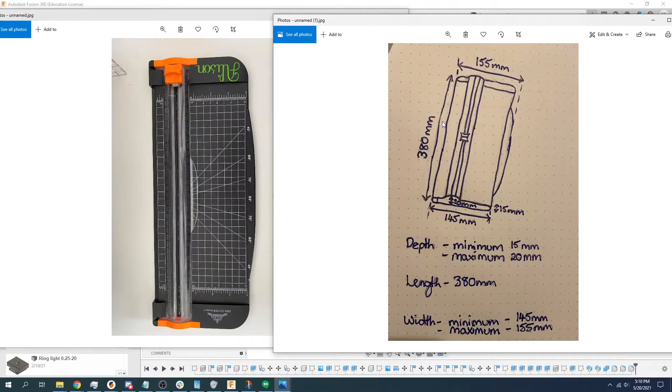So I'm going to get rid of this photo since it doesn't matter too much for what we're doing, and move it away. We're going to bring Small Grant into the picture. Hi, Small Grant. And of course we have the stunt double here with us, because Victoria is off making sure all the 3D printers are running happily.

It would be more expensive to print and ship. I believe Allison is in the UK, so that might be prohibitive. But if I'm correct, Allison got a 3D printer, and we're going to send her the file for this. Allison, if you want, I'll send you the raw Fusion file so you can make adjustments, or add logos or names before printing it out. If you didn't buy a 3D printer and I'm confusing you with somebody else, let me know and we'll find a way to get this to you.

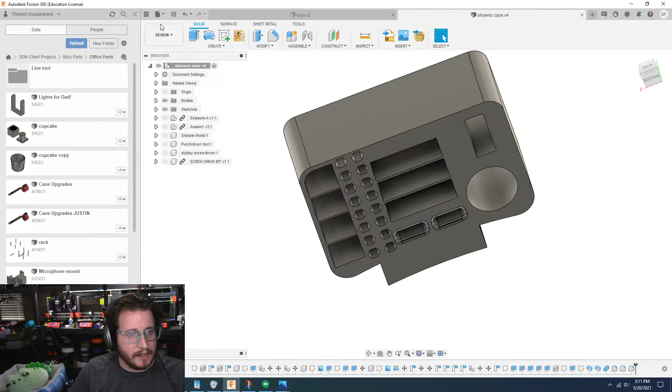But first things first, I am the realist, we need a new design here. I think this one is most effective to work from the front. So I'm looking at which direction I want to work from, and I believe the front is the best option since we're going to be extruding outward. So I just need to make my profiles for everything. This should actually not be too bad.

Okay, yeah, I'm sorry, I'm so busy that I forget who buys printers and who doesn't. Leash is the one who bought a printer, so sorry Allison. But wait, Allison, aren't you... we're gonna find a way to get these parts to you, come hell or high water. Damn it, I'm gonna find a way. But yes, I know a couple of our crafters have bought printers, and I honestly forget who.

Because for those who don't know, we've been doubling down heavily on content on our YouTube channel, which means I need to hire a lot of people. In the past 3 weeks I've had over 100 interviews to bring in new staff members so we can start taking marketing very seriously. That makes me happy as a business owner, that we're able to bring on more people, get money in the pockets of people that need it, and let people learn in an awesome, fun environment like this. Anybody who works with us can tell you, it's one awesome community we have here.

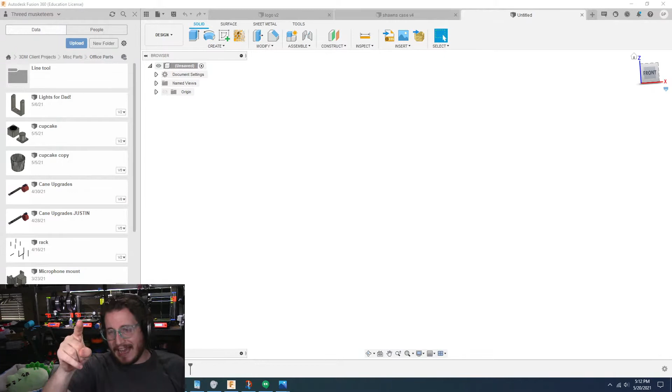Oh Justin, I like your idea buddy. We're going to reach out to Geeky Faye and see if she can make this part for Allison. I'll make sure to compensate Geeky Faye. That is bloody brilliant, and that way we can get Allison the part, since Geeky Faye is in London in the UK. That will friggin' work. I'm gonna do this, we're gonna make this set up.

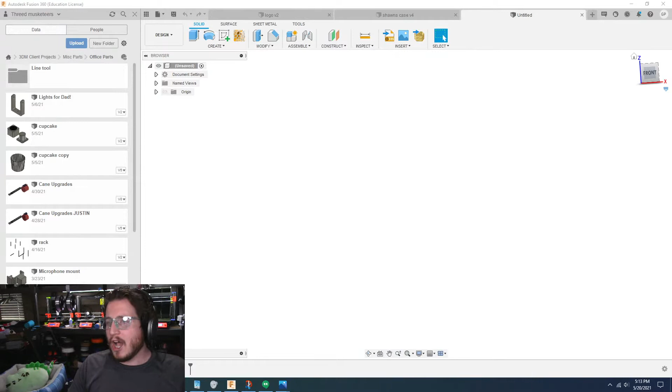We're here to watch me likely get frustrated, but learn a little bit in the process. So, we are going to first get her basic system built.

You're embarrassed to have her watching. I'm not embarrassed to have Geeky Faye watching, but I don't want to ping her and then be like, hey, come watch our stream. We're very clearly, I don't want it to look like we're using her as a way to get to her target market. I always feel bad about asking other creators to come hang out, because I don't want them to feel like I'm just doing it for the views. We're not. I'm doing it because I think Faye would be an awesome person to help out with this, because she is in your area, and if you all are vaccinated and close enough, that'd be a really cool meetup for you, because Faye is all kinds of awesome.

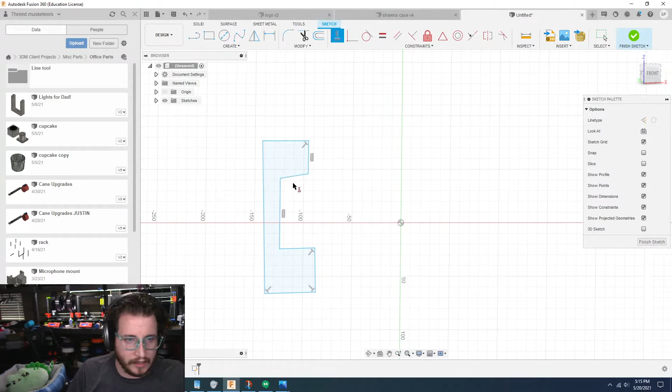Done! No, we're not done. So we're going to start doing some constraints here, like vertical and parallel, to just put everything in line. There we go. We're looking at a max of 20 millimeters, so we're going to start with our dimensioning tool.

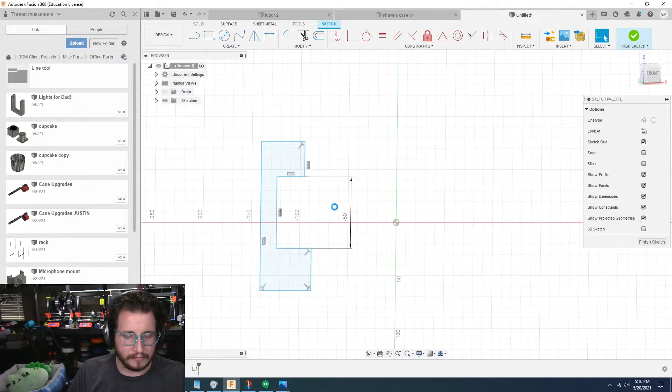We're going to grab this bit here. Boy, that's huge. We're going to make it, I'm thinking 25 should be good. There we go. And so if that's 25, I'm thinking the exterior being maybe something like 50 should be adequate.

Nope. It's the fun thing about parametric sometimes, you gotta look at the things that are gonna bother you the quickest. So we gotta get rid of that. We are going to change the dimension of this. I'm thinking maybe 6.7 millimeters on the bottom, about a quarter of an inch, and up here, probably about the same. I'm gonna go 10, just to make it a little bit easier.

We have 25, and we want this distance. This thing is 380 millimeters long, so we want to make sure that we give it some structure, some strength. But because we need to also allow this to have a screw go through it, I've got some plans here. It's going to end up with some fingers, and it might end up having a part with some support material, but I think it's going to end up being okay.

I think this at probably 20 should be more than adequate. And that will bring this top section up to, I don't know, what are you guys thinking? 30? 30 sounds good. So we're going to take the equals, we're going to go, this is equal to that. So this is equal to this, which it already should be.

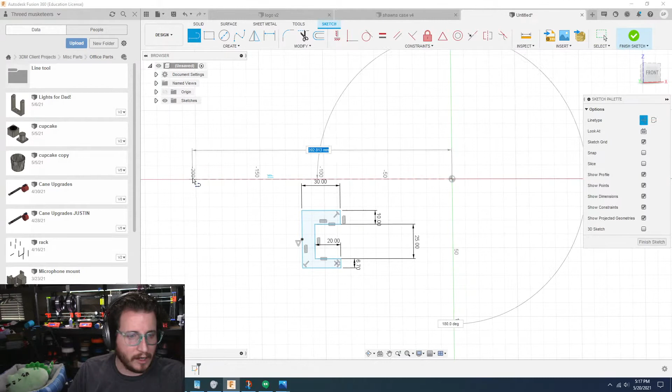Now we're going to grab a point. I'm going to put this point in the middle of the back. Nope, we're going to make sure that we grab the center point here. I hit L and X to make sure I have a dotted construction line. I'm going to grab that center point, come out a general distance, hit escape, hit L again so I can come up as well, because that is going to be important since we are going to mirror this thing. We are then going to take this point here and make it coincident onto here.

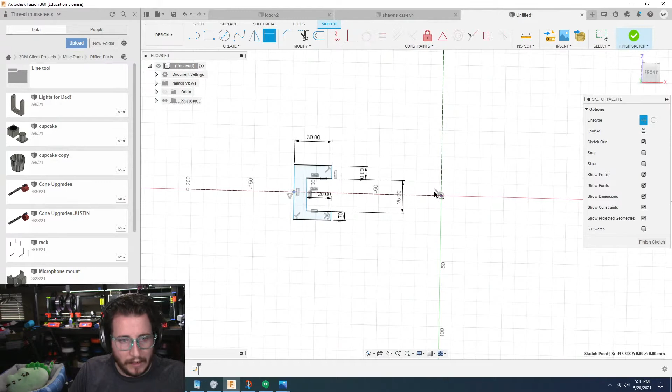Since we know the unit is 380 millimeters wide, we want to give her a little bit of leeway, so we're going to go with 385. That should give plenty of distance. Let me grab my phone for the calculator. 385 divided by 2 is 192.5, so we need to hit a distance between this and this to be that. There you go, that's the basic of what we're doing here.

So we're going to grab this. We know the unit is 145 millimeters long. We don't need to go that whole distance, although it looks like it goes all the way to 155. I'm figuring if we give like 120, I'm going to do 110 — that allows me to print it on a Prusa Mini. That should be adequate to hold it.

So we're going to hit E for extrude, grab this section, and extrude out 110 millimeters. If all Allison was doing was putting some Velcro up here, we'd be done, that's it. But we're not — we're going to do more than that, a little bit more.

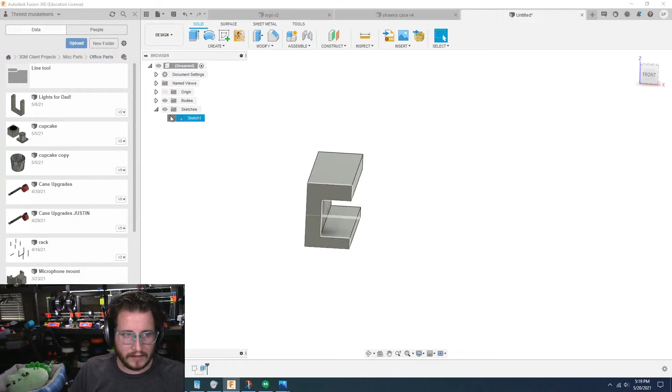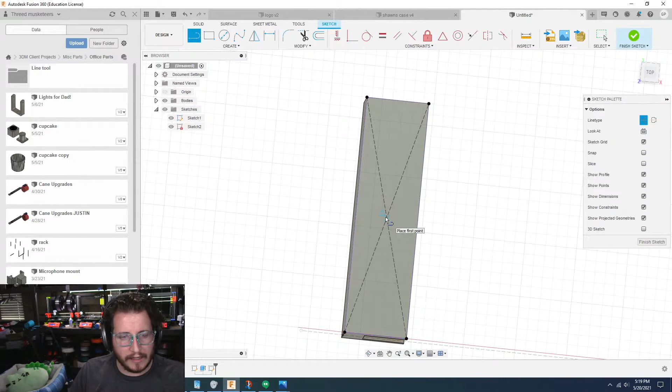And that's going to involve some sketches from up top. So let's get a sketch tool. Let's grab the top section. We're going to hit P for project, to project that top surface — that lets us know where things are. L and X will help us pick up our center. And now we have our direct center, which is important because we want to make sure everything we're doing is across the center.

So there you go. I want to make an ability for her to have a screw. Allison, do you have any screws or hardware handy that you can give me a measurement for? If not, I'm just going to make some basic guesses.

Justin, I love your post that you're doing for Faye. That's great. It says: at Geeky Faye Art, we have a cool product we're working on with a subscriber, and they are based in the UK. We are live streaming the design of it now. We would love if you could help out with the printing, as it would make it way easier to ship locally than across the pond. Awesome, awesome, awesome, Justin.

He continuously impresses me, it's great.

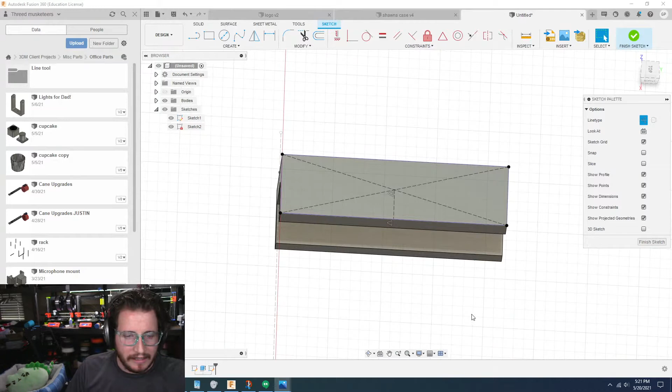Okay, not on hand — Justin is saying M3 or bust. M3 is great hardware, but it's not great if you want stuff. Like, M3 is good if you're screwing metal to metal using nuts and bolts, but I'm guessing this is going to be like a drywall screw going into the bottom of a desk. So I want to give it a little bit of movement. I'm thinking like 3 millimeters — nah, let's make the whole thing 5 millimeters, right?

That should be fine. And so what I didn't do is we didn't pick up where this is, so I need to pick up where that is as well. This shows us with that purple line, which is very, very hard to see. Actually, ooh, I screwed up.

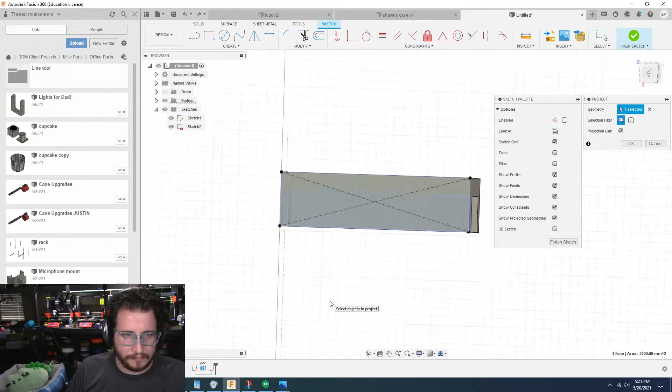We want to make sure we get rid of the X, hit project again, then X to get rid of the construction line. So now we kind of see where things are. I accidentally deleted this, so we'll bring that back, and now we're going to hit X to get rid of it.

We're going to hit C for circle, and we're going to make a couple of holes. Yes, you can always add washers if needed. So that's where I'm at — whoops, phone slid onto the 3Dconnexion. I'm thinking 5 millimeters might do it.

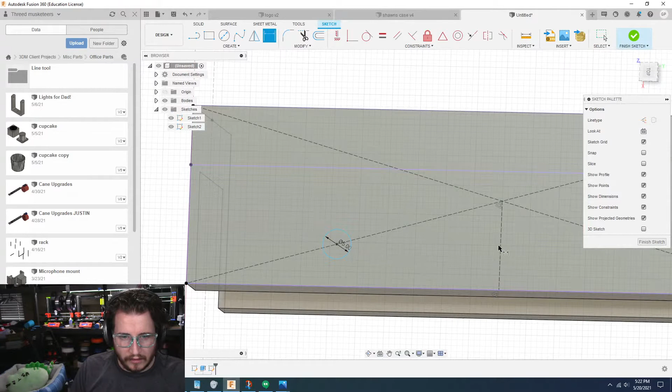I'm thinking, how far away? I mean, these paper cutters are not heavy, right? It's not like one of those big ones from grade school where if you used it the wrong way you'd be going to the emergency room and meeting Amber. I don't think this requires that. This is stuck on that line — okay, it is. So we're going to do a dimension from here to here just to get an idea of where we're at from the center. Let's go 30.

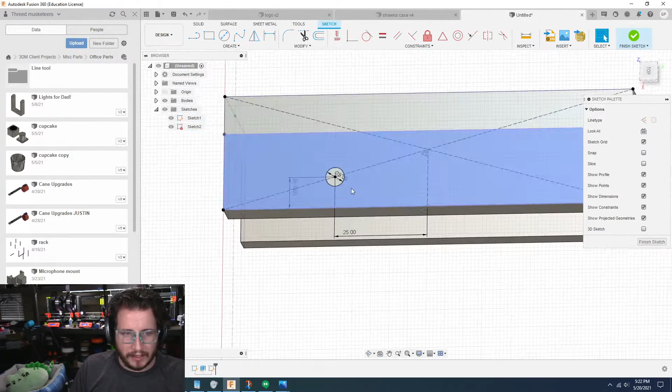I'm curious to see the number from here to here. It's going to yell at me saying I'm over constrained, but I don't care. I'd rather this be than 25. That'll give you 50 millimeters in between, so you're not hanging over more than 50 millimeters. Let's just verify - it's going to yell at me again, but that's okay. 30 millimeters. All right, I'm okay with all of this. I think that'll give you lots and lots of room.

But how are you going to be able to get the screw in? It's not going to fit. So we got to make something that's on the bottom so that you can get a screwdriver up into it, right? Let's take a look at what that would be.

Because we want to remove as little material as possible, but we also want to make it easy to print. Having something that's at an angle would be easiest to print, but, realistically, it doesn't need to be.

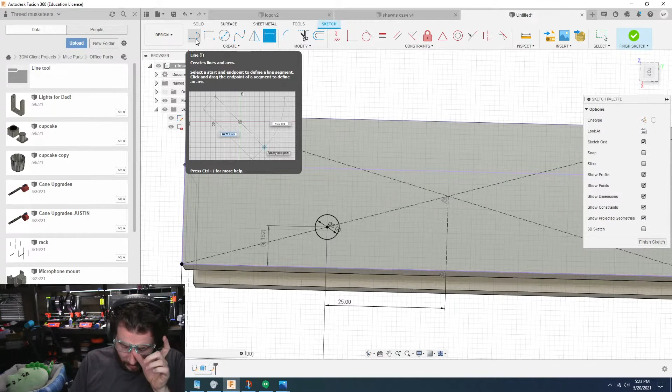It's funny because what we're going to do is we're going to print this so we can have it for Time Lapse Tuesday. And then I'm going to give it away to a local crafter. Maybe I'll get with Jen at the Sewing Report and get this over to her so she can use it. Or a local crafter, I don't know. We're going to get this to a local crafter. That way people can get a hang of it.

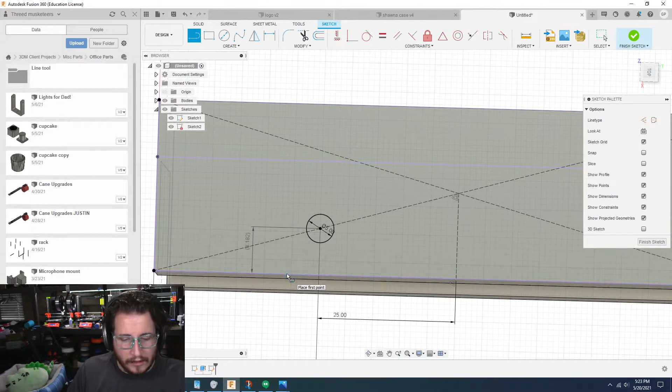But I'm thinking we want to do a line. We could... you know what, let's do it, let's do it. Grant's thinking in his head of what he wants to do. Let's do it this way. All right, I'm thinking we want to give ourselves at least like 3 millimeters.

And okay, we have another line here, but now we're going to do, or a circle, we're going to do a line. We're going to come right off this edge, and you won't be able to see it there, but I will show you here. We're going to go right into it. If you grab a center and you just come over, you see that dotted line? That tells me that I am in line with the center, and I can come down to here.

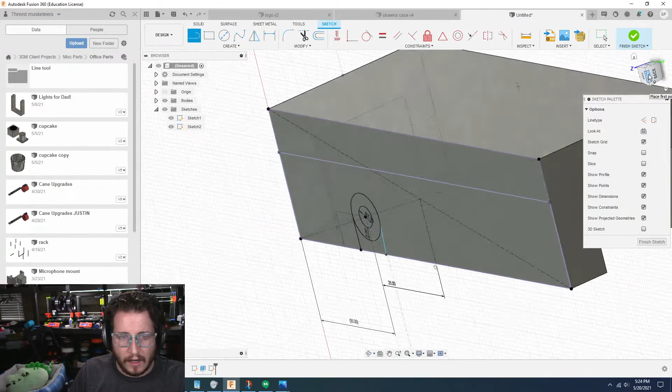Now, you might look at that and say, Grant, that's not level. You're right, and also, I am a little cattywampus here. So we're going to use horizontal vertical to click that, and it's not concentric. So what I'm doing is I want to make it concentric because I want to basically cut a slot out. I think the slot is really where we want to be for this, and because of that, I need to make it concentric.

So we need to take this to that. Is that the right way to do it? Maybe, maybe. Nope. Alright, why are you not concentric?

Interesting. They are parallel, you're just for some reason not concentric. Oh, tangent, you idiot, it's a tangent. Oh my god, it's not concentric, it's tangent.

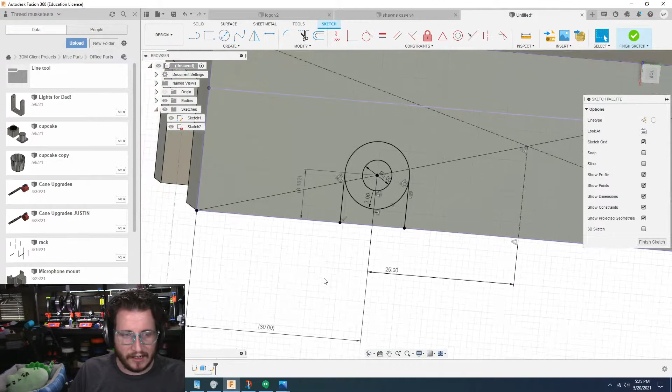Sometimes, some friggin' times. Oh man, my air conditioning just kicked on. Woo, it's getting a little toasty in here. I apologize, you're going to hear a whistling. Can't stop, it is what it is.

All right, that's what we're going to need to do. We're going to... yeah, well, I'll do it afterwards. I want to show a different way to mirror it. I believe we've only ever shown mirroring the actual sketch, but in this case, we don't need to do that.

So we're going to go ahead and hit extrude. We're going to extrude this one all the way through here. But we don't want to go all the way down yet.

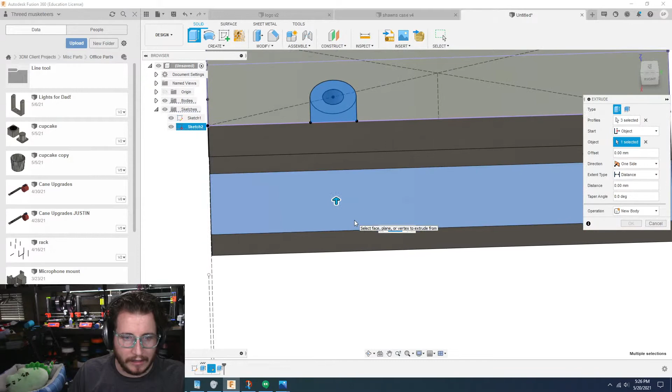Gonna bring this sketch back, hit E again, grab these pieces, but we need to do an offset. So we're gonna do instead of profile plane, we're gonna go to offset. We're gonna click this to cheat. It's going to tell us, nope. Oh no, we're going to do an offset, Grant. We're going to offset, okay, negative 30 millimeters, just so I have enough, and then 35, and there you go.

That is now the parts. Technically, we don't need to go that deep. We can go, like, 15, and it'll get right through it.

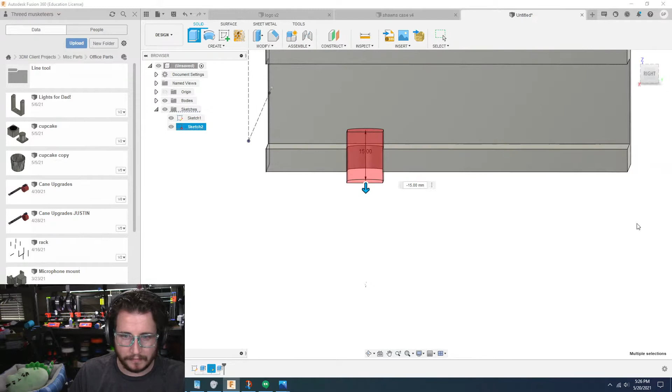So if we want to mirror something, we can still go here into your Create tab. You can go to Mirror, and we can actually mirror the faces. I think I actually did do this at some point, but whatever. We're going to mirror this face, this face, this face, and this face across. Grant doesn't have a plane, so we're going to do a construct mid-plane. We're going to click that edge, and boom, we've now just made ourselves a mid-plane.

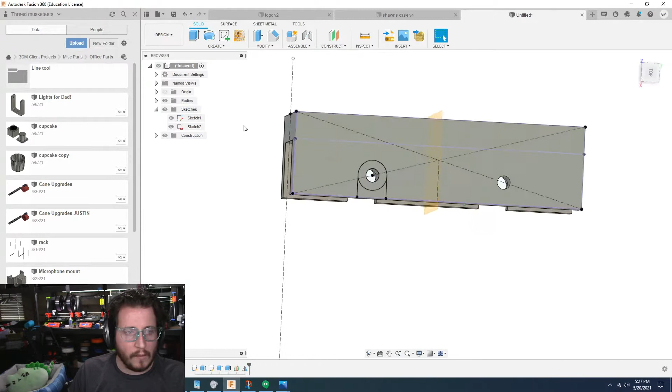Now we can come back here onto the mirror section. We're going to do mirror faces once again. Mirror that face, and this face across that plane. Click OK, and there you go. We have now just mirrored something that is a physical piece.

But before we do that, I want to clean things up just a little bit. And you know me, what are we going to do when we want to clean things up? We're hitting the F key to pay respects for the fillets.

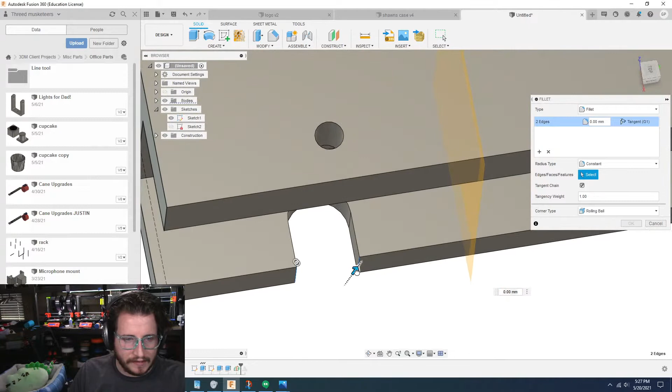Gonna add some fillets into here. Is it necessary? Absolutely not. Is it worth it? Absolutely.

We've got that, that should be good. I do want to add, it's a 2 millimeter. Let me see if I add a fillet onto here, how we look. No, we'll add a chamfer there instead, and that's going to allow Allison to use a countersunk screw.

So that will be 3.5. I like 3.5 better. 3.5's good. We can actually check something.

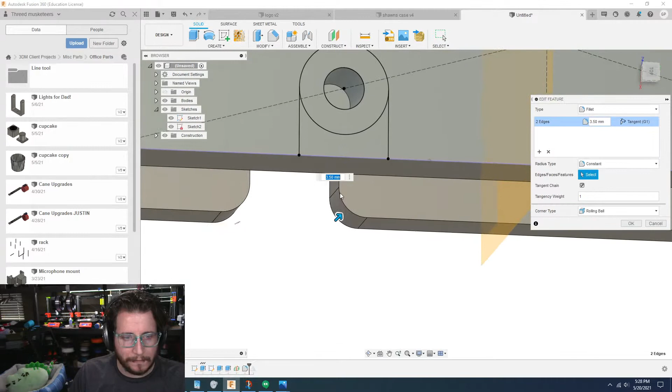If we go back into Sketch 2, we can see... oh boy, where'd we go? Here we are. That we were 5 and then we went to 8. So if we do, instead of a 3.5 millimeter, if we do 4, it should actually match this exact path. So that's kind of cool, a little bit of something to keep in mind. So that's what we'll do there.

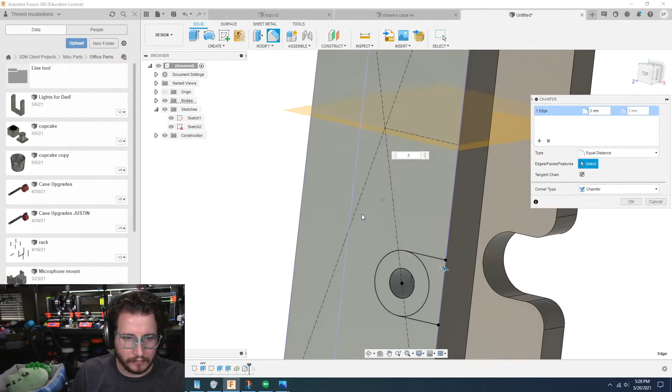We're going to do a chamfer, which is right up there. We're going to grab this bottom edge, and we're going to chamfer it. I think 3 should be more than adequate. Yeah, 3 should be plenty fine. Yep, 3 is good.

So now, turn off this sketch. So now when you put the screw in, you are able to put the screw in, and it will be countersunk. So there you go. I mean, nice and simple.

Now we have to go back and let's see if this works. It's probably going to break. Nope. We can come back here and actually add some more faces in by hitting and holding control, grabbing that face, and that face. There you go.

Ladies and gents, there's our part. Is it pretty? No. Am I pretty? Not really.

But so we're going to try to clean this up just a little bit by hitting, once again, F to pay respects, for fillet. Only the video game guys will get that joke, man.

God, that's tough sometimes. All right, we're going to add some fillets up here. Like a 1 millimeter should be more than adequate.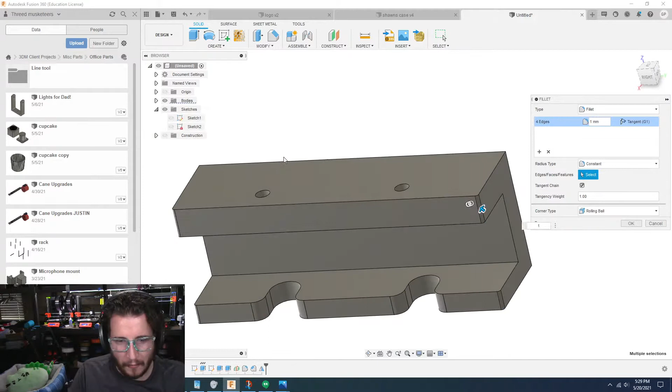Actually, we're not going to do that. We're going to do a fillet of this entire edge. So when you do an entire edge fillet, it's actually going to grab the entire surface. And I want lots and lots of surfaces filleted on this because I don't want it to be very sharp.

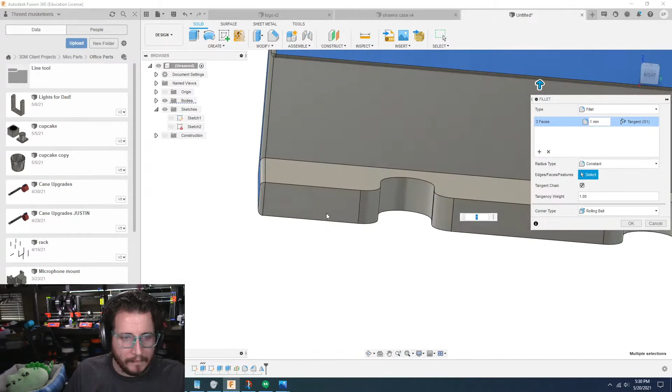So even here, whoop, that's control. There we go. So this way things don't end up being very, very sharp.

Now, we don't want to deal with filleting those. That's just going to be a pain in the keister, so we'll leave it that way. And this should still print okay, but there you go. That should make it nice and happy.

But Grant, you only made 1 piece. Oh, my dear, you have fallen into my trap card. We are going to mirror the entire freaking body across this.

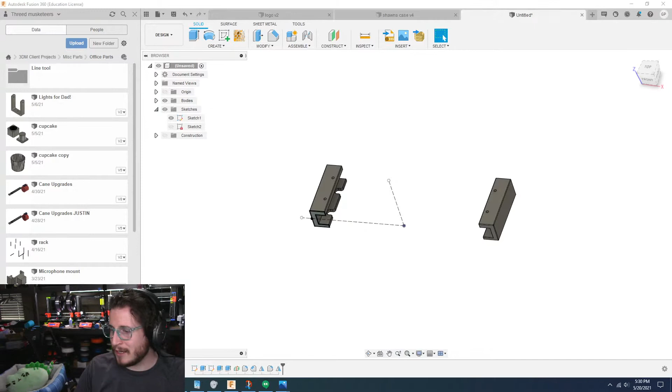There you go. I think that is the fastest live design I've ever done. I think, is it the fastest live design I've ever done? I think it might be. Let me see how long we've actually been live streaming for. 33 minutes! That is officially the fastest live design I have ever done! I think my dad's part might have been a little bit faster, but there you go.

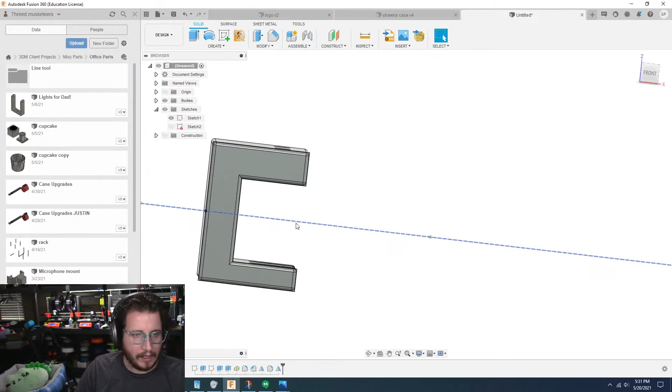Again, it doesn't have to be amazingly pretty to be effective. We could look at this and say, could we cut this down? We probably could. It's not going to hold a bunch of weight. And remember about orientation, we talked about this.

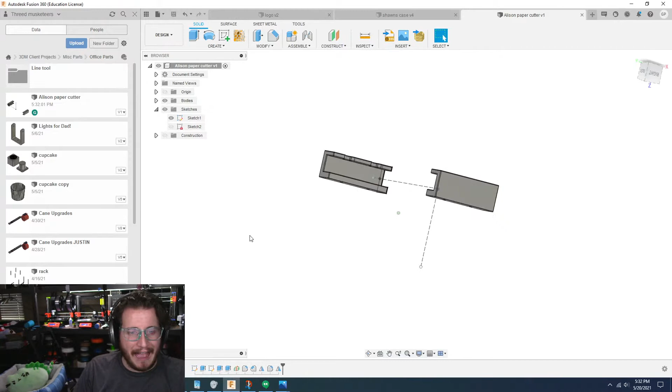Allison, give me something more to add to this, just for kicks. What else should we add? Maybe some tools that could slide in on either end that we can add on? I'm like, this is just too easy. I'm using the same basic techniques I've always used, and I want to do something a little different.

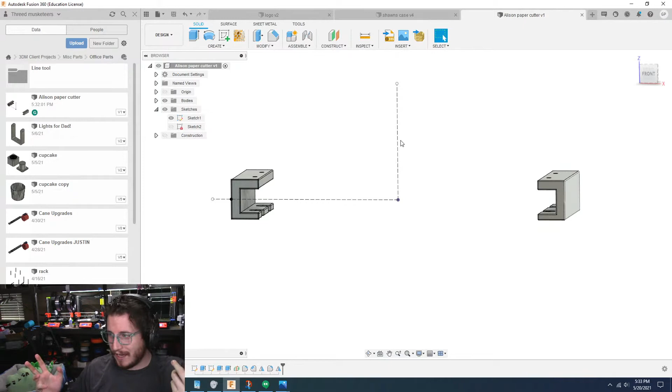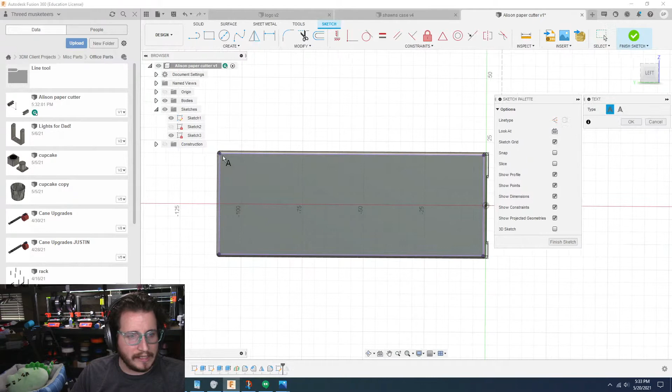Justin is saying a name on the end, so we will go ahead and do that. Actually, we will do this before we mirror the parts - that way when we mirror the part, it just takes care of it. So we'll add her name right on the end. We're going to project this surface because that's what we need, go to create, go to text, grab the point here and go all the way to there.

Allison, and we are going to use... I've got some really fun fonts. Allison, you got a particular font? I'll see if I have it. Like, I got fun fonts.

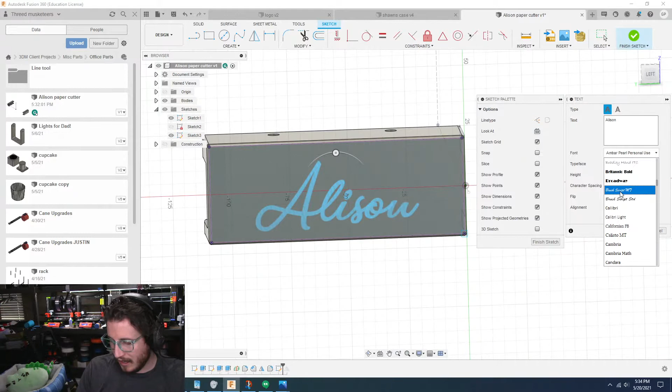No, Justin, I am not doing it in Comic Sans. You all got me with Papyrus the first time. I am smarter now - it's all about getting smarter every day, which, by the way, is a phenomenal YouTube channel. If you don't know Smarter Every Day, you gotta watch it. Destin Sandlin is an awesome presenter, although he's gone more the meme way recently. Some of his older videos, especially the tattooing video, are absolutely cool to see what it's like.

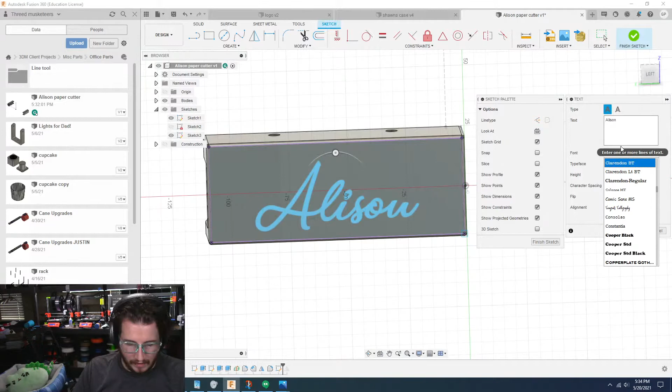Yeah, we're not doing Comic Sans or Papyrus - you're not getting either of those guys, so, you know, meh. Bodoni? Let me see if I got it. I do! But that's so, like, normal. I mean, I can do that, that's totally fine - whatever font you want, if I got it, we can do it.

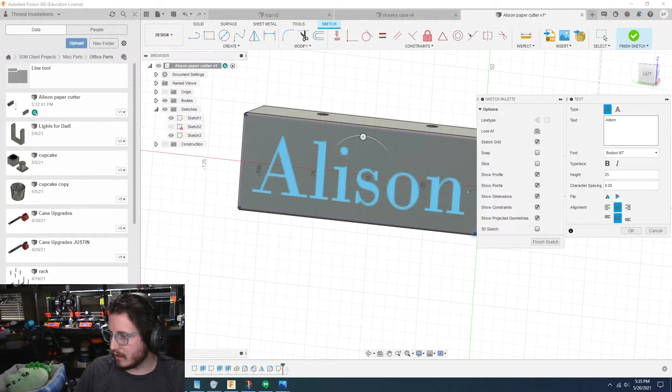Let's see, what are we thinking? That's good for you, sweet. We are going to do that, and we're going to finish the sketch because that's all we need from it. We're going to extrude it in negative 1 millimeter, maybe - that should be enough, I think.

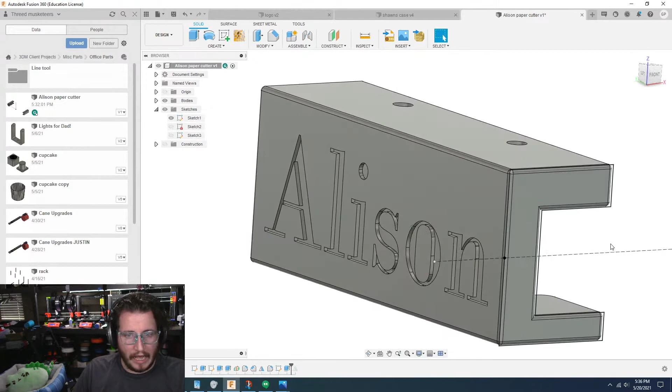So we're going to come back to the fillet here. I'm actually going to turn off that edge because now we're going to hit the fillet one more time, and that will allow us to do a 1 millimeter fillet here. Oh no, it doesn't like that. Oh no, are you not going to like the fillets? Okay, just had to be a 0.5 millimeter fillet. Alright, so it's not all that even, but hey, whatever, it works.

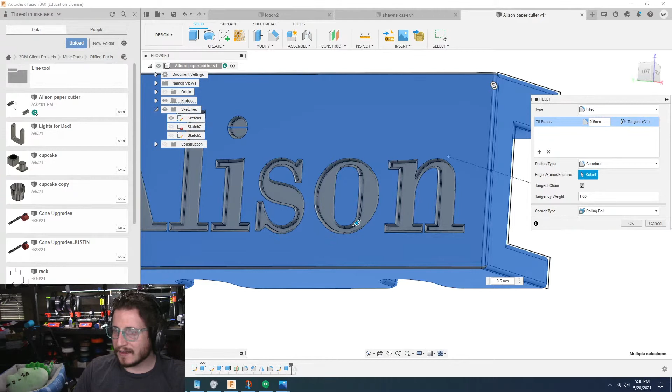Faye responded, did she respond? I'm going to Twitter right now to find out. Alright. Yay, Faye!

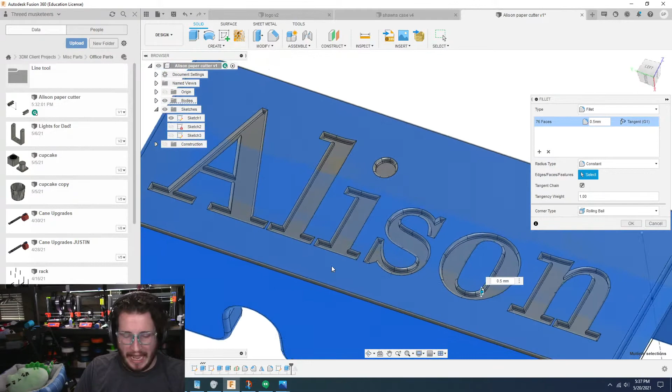We could do the Benchy and do 0.2 millimeters. We could, but I wanted to have a little more depth to it, and so you might initially think, wait a minute, this is going to actually make the part weaker, and you would be wrong. It won't, because what's going to happen is - you know what, here, we're going to do this my way. Alright, so now we have our part.

Ooh, I wonder. That's fine, that's all fine. Alright, because I'm just going to flip this part horizontal. I bet I can actually just do this. Let's see if we can do that. This one I want to... there's got to be a way to...

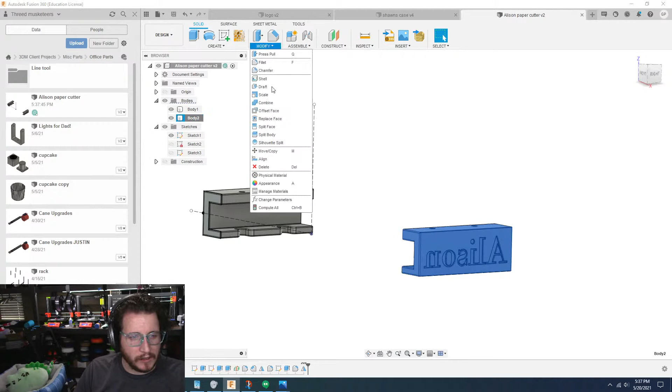What is it that he is thinking of that he wants to do? I want to, like, literally mirror it on itself. Would that work? Let me find out. I have the construction line back here, so that body mirror plane is that.

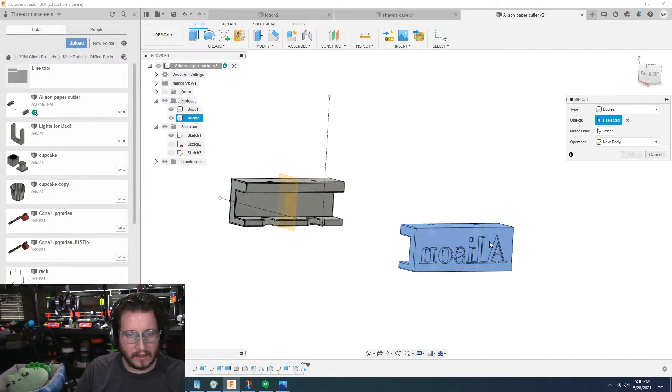Good enough, there we go. So we have Alison running correct both ways. And when we have a body that we're not going to use anymore, we can just hit remove, and that remove actually stays within the history.

If we printed this... damn it, you're right, Justin. He's right, we don't need to mirror it, we can just print the same part twice. Don't care, this is how I did it. This is my live stream, and we're going to do it my way.

Alright, let's download these bad girls. So we're going to right-click on it, save as STL. We're going to save it. I'm going to come here, open up Prusa Slicer.

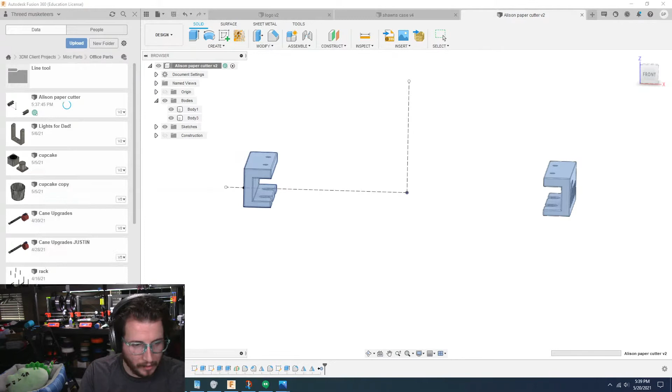Yeah, that's right, it's my way or the highway.

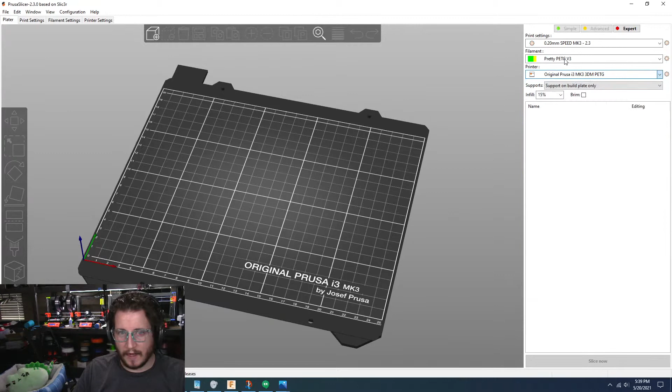I'm going to go to the stock Prusa profiles because I think it's only fair to use the stock Prusa profiles. If we use our profiles, it's kind of basically like cheating. We will use a generic PETG because I can't assume that Faye would have anything else. And we are going to go with their 0.2 millimeter... actually, 0.2 millimeter quality, because we care.

Alright, we're going to grab our part. And of course, it's way too big when you bring these in. So how are we going to fix this? We are going to hit the object, split into object button. Then we're going to hit arrange, and that brings everything into where it needs to be.

But Grant, this is not the way you told us to print things. I know, bear with me. We're going to grab a part, we're going to grab this tool here, which is place on face. Boom and boom, done.

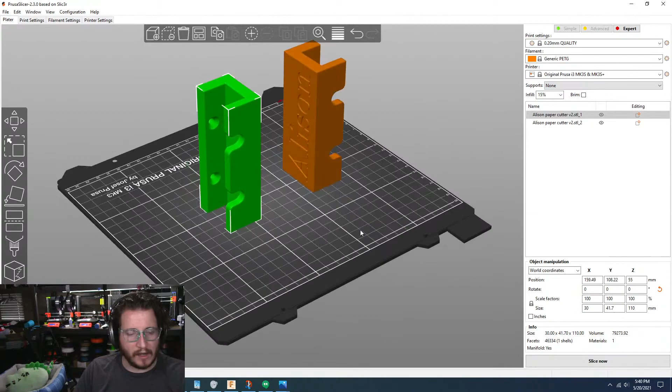This is the orientation they need to print it because this will be the strongest. Straight up will be the strongest. And because it is going to bother me, I'm going to flip this one over. I want the A's at the top for both of them.

Thought you were going to start singing my way. I'm not a great singer, I just like to make obscure song references for the hell of it.

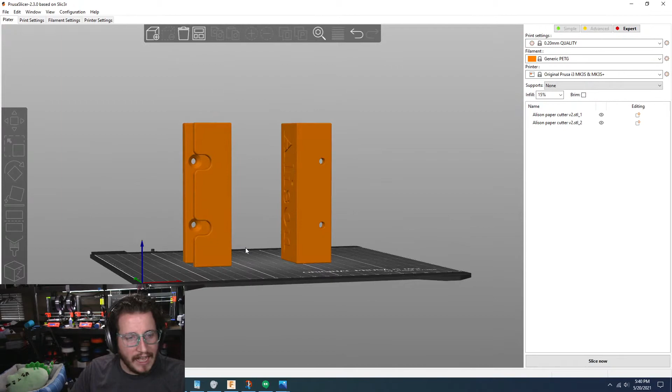So we could look at this. I bet... nah, that's going to need support.

Alright, we're going to talk about the paint-on supports for Prusa, because those are pretty cool, I think.

Little Grant gets in the way. He does, so we're going to get rid of Little Grant real quick. We're going to do the auto set by angle, and we can look here, we can see where it wants to put supports. I know for a fact that a Prusa can handle 25, no problem. So we'll hit enforce, but we really don't need to support the inside there, so we can up our brush size. If you hit and hold the shift key, it just removes the support material that it just made.

And this is paint on supports, one of the newest features of Prusa Slicer. This does not need to be supported either, it will handle it just fine.

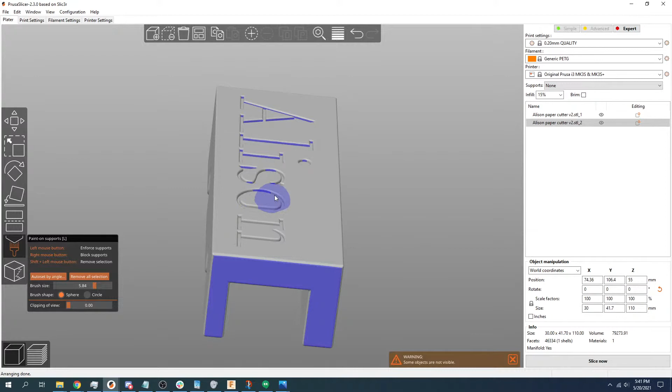La la la la la la la. Nobody wants all that friggin' support material. Cool.

So if we look and we do, let's go with support enforcers only. Yes, yes, yes, okay.

Oh, I guess quality prints so much better than speed, and it's only a few percent more. Cool.

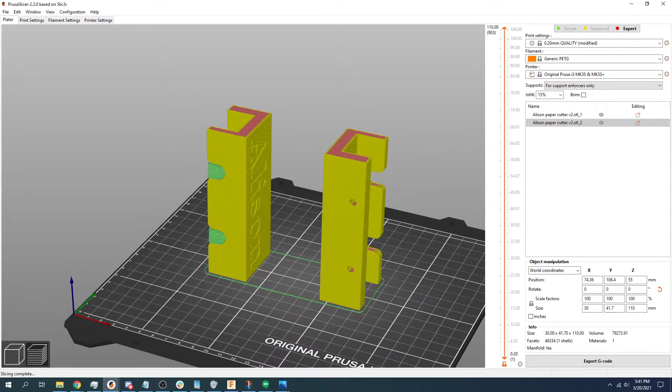Now we look and we can see, okay, yes, there are some bridging perimeters. They might sag a little bit. I don't think it's going to be that big of a deal. That'll be fine, it's just that right there that I'm worried about.

Interesting, because I only did support enforcers only, and clearly I missed something. Oh, I know what I missed. We're going to come back in here, we're going to look. I bet money... yep, there it is. Go away.

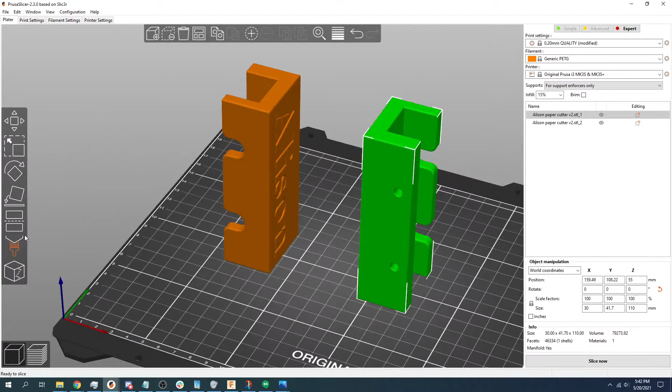So we're going to do the same thing over here, but we're not going to make any of the changes, okay? So all I did was just go into the paint on supports, auto set by angle at 25%, enforce, and that's it, we were done.

I'm going to slice these both, and you're going to see the difference between them. Look at all that. Nobody wants to deal with that. And guess what? It doesn't make anything better, it's a pain in the butt.

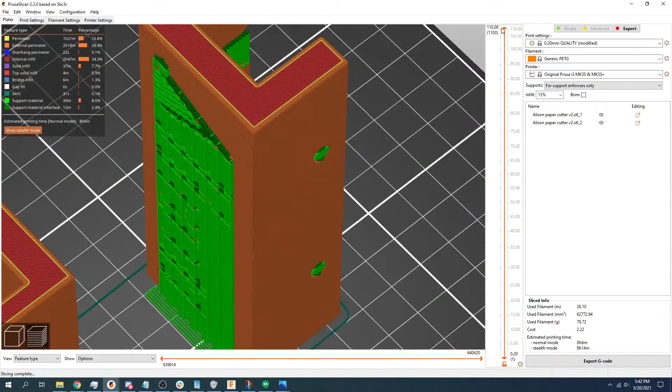Of course, it's gyroid that it uses. But yeah, look at all that support. No one wants to deal with all that. I hate that, I'm going to get rid of it because it's ugly. And I got rid of the wrong one. Go figure, of course Grant does that.

Alright, so we have our one part, and it is gyroid, which honestly is great for time lapses, but it just takes too much time for everything else. Way too much time.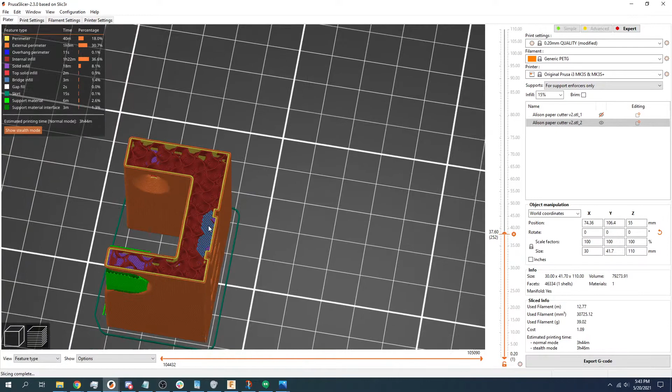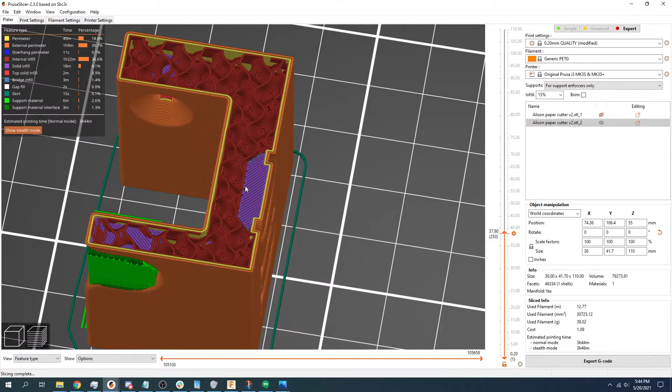So I think the one we give away, we'll get rid of Allison's name on it, because it's weird to give something to somebody with a different name. But like I was talking about earlier, the name isn't going to make it weaker. You end up with these perimeters that move around more, which gives your part more rigidity. You also get these solid layers that build in, giving you that extra thickness where it would have originally been relatively thin. Now it's solid material right from here to here, with only a little bit of infill. So I'd argue this is actually stronger. That's the way I think about it.

If you look at it, this would be a 3 hour and 44 minute print. It would use 39 grams of filament, and Prusa uses $27 per kilogram for its filament price, which I think is pretty good value if you're buying material straight up. So if this was your own printer and you were doing it for yourself, you're looking at less than $2, realistically less than $3 to build this part, which is crazy cool.

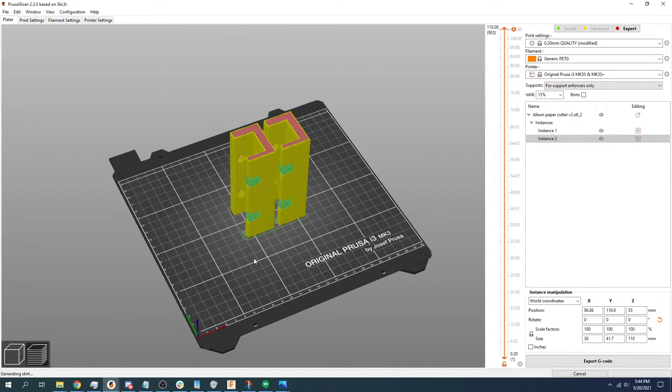And Justin is totally right, I can just hit the plus key and that gives me another one. There you go, ladies and germs, we have it done. There's our part.

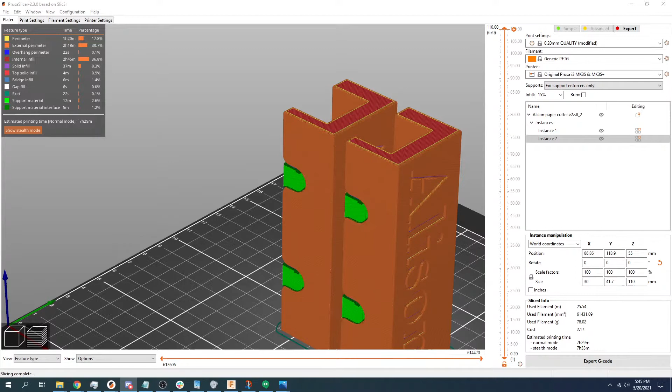Wow, Grant actually designed something in his limited time. You gotta love that. So anyways, let me see if there's anything I'm being yelled at for. There is not. I'm excited guys, I think this is a great part. Good energy on this video.

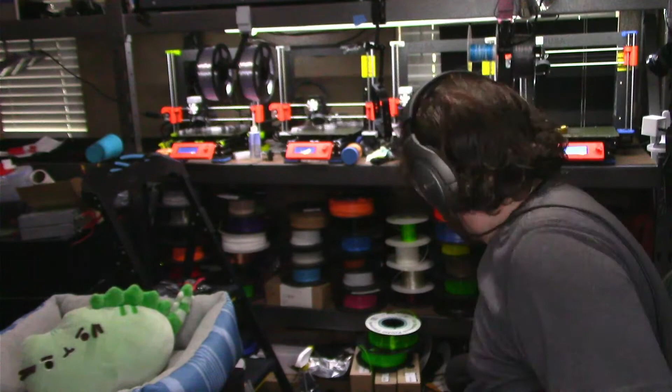Even further, that's where the enclosed printers are going to be. Ultimately what's likely going to happen, and Grant, since I know where it is, the mini's on the floor, I used it again as a prop. It's actually been doing some printing duty, you can see I've got some poles on the bed already because we printed ABS on a mini. So we're going to have 2 minis over here, 2 minis over there, and 2 of the Mark III's over there, and all the printers on that shelf are going to be fully enclosed.

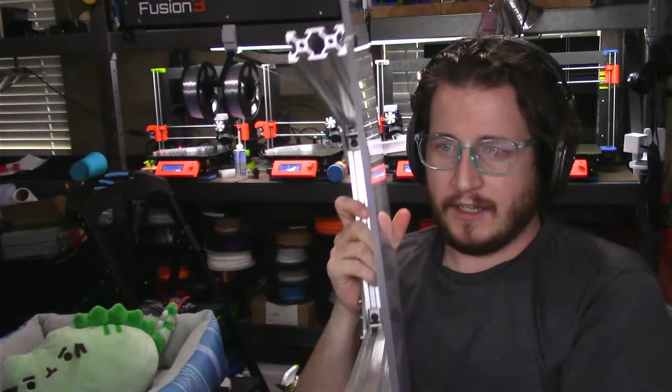Now we can open them up if we want to. My thought was to use 2020 extrusions, and we have those in stock. So I'm going to show you, I have some 2040 right here from a project. This is 2040, it's 20 by 40 millimeters, the name makes sense. And we can build anything we want out of this stuff using brackets, using printed parts, whatever.

But with acrylic, we can actually build boxes where you can slide acrylic in here and in here, so you can basically build an enclosure box. I would love to see if that's what you guys would like. If we could do a whole building project on it, I would love to do that with you guys, where we're doing a build project and it's more like a hang out in the shop kind of thing.

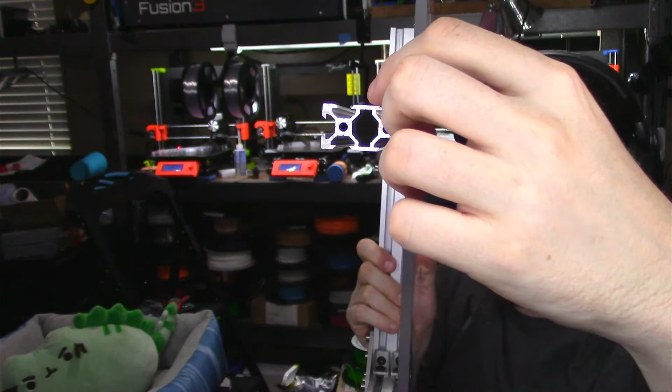The material I mentioned is aluminum extrusion. This is known by its size, 20 millimeters tall by 40 wide, so it's called 2040. This particular type is called V-slot, because if you look at the slot, it's got a chamfer on it for wheels.

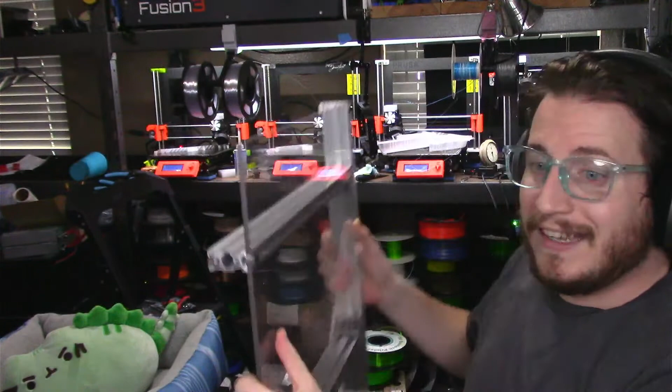This piece was originally part of our big ass D-bot. I talk about it in the video coming out tomorrow, but this is the size of the build plate on our biggest 3D printer, 16 inches square, and it's 31 inches tall. You guys will actually get to see what a 31 inch tall part looks like.

I have some, but I can't go get it because walking for me right now is a little tough. My back has really been acting up these past couple of days, so you're not going to see a lot of walking out of me because the pain is setting in real hardcore. But hey, whatever, that's not going to stop me from making badass content for you guys.

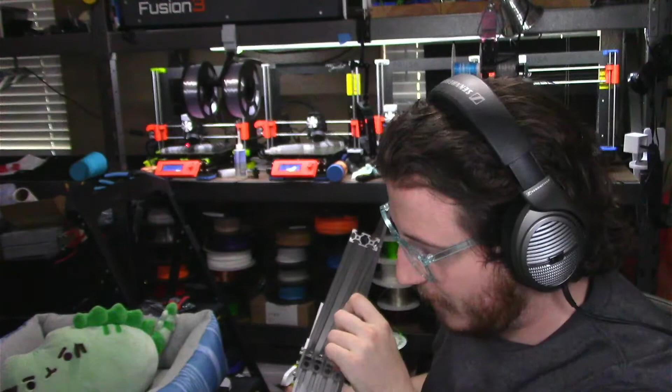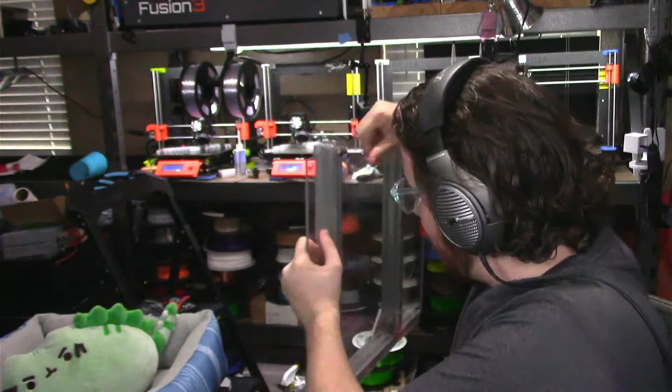This is a piece of acrylic. We worked with a local college to build a new Z-axis for the D-bot, and this is what they used to show the size of that Z-axis in their presentation. This material is great to build with because you can cut it with a regular chop saw, a circular saw, a jigsaw, and if you're a masochist, even a hacksaw.

It's really easy to cut, but I figure it's a cool way for everyone to see that I'm not just a business owner, the random guy pretending he knows what he's doing in Fusion 360, but that I also have some experience building real parts properly. So if you all want to see that, next week we'll plan to do a live stream.

By the way, I apologize for this being a day late. I was actually supposed to be at a mural unveiling yesterday. I'm part of a few boards of directors, and we had a mural unveiling planned. Well, unbeknownst to me, they changed it and didn't let me know, so I messed up our entire content calendar so I could be at an event that didn't occur. Gotta love boards of directors, especially when they don't know how to be run.

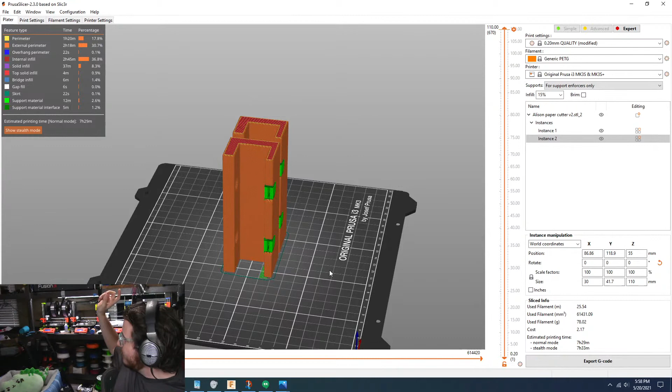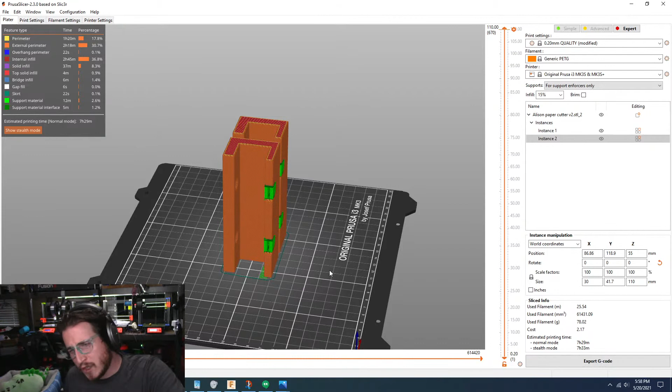Remember that you too can make awesome, and we at 3D Musketeers can help make that happen, whether you think you can do it yourself or you want us to do it for you. We can help you make awesome every single day. That's what this is about. You know what, I want this to get real, so I'm turning off the music so you can listen to me real quick. This is such a big deal about making awesome, and so many people say we can't do it, we can't do it, we can't do it. Damn it, you can do it!